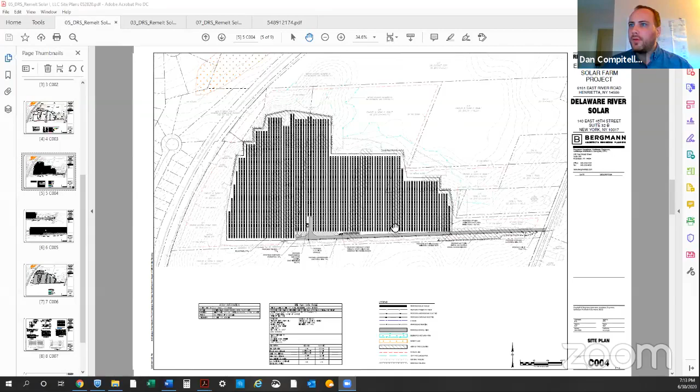Inside the solar farm itself, I'll zoom in so you can see some details. We will need to square off the northern boundaries of some of the treed areas to create the footprint for the project to sit within. There are also some hedgerows bisecting the fields that run through the property now, which we'll need to clear as well to create an open field for the solar farm.

Other than that, that's the only tree clearing we need to do. On the southern part of the property, there may be some tree trimming, because we need to make sure there's no shade cast on the solar farm from any trees in the area. Otherwise the solar panels just wouldn't operate when they're shaded. But there's not much tree clearing required for this project.

We will still be maintaining the dense tree buffer on the east side of the project, which I believe is a question the Conservation Board will want more details on, so let us know if you have questions. There's also a thick tree cover on the west side of the project, at a minimum of about 150 feet deep, rising up to a few hundred feet thick before you get to the railroad tracks that border the west side of the project.

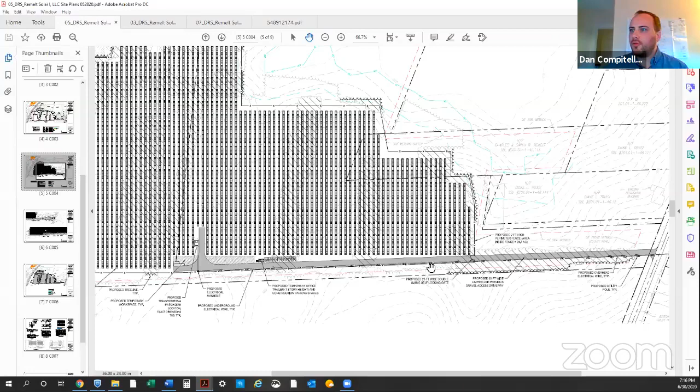We'll have an access gate at the beginning, right at the end of the entrance road, and it will wrap around the entire fence, the entire system. That fence is up to National Electric Code standards, a minimum of 7 feet high. At the road, we'll have to connect onto the RG&E power lines, which stand 40 feet tall at the road.

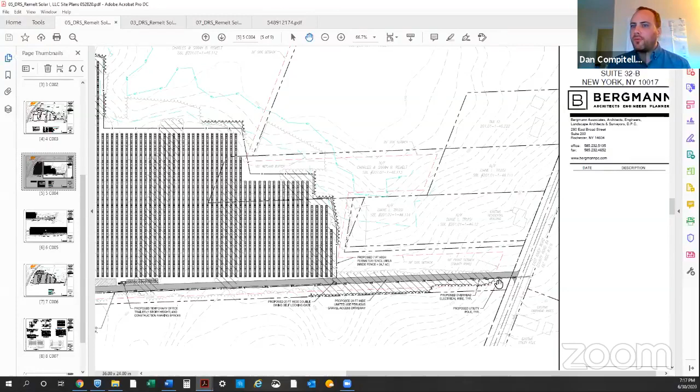So to do that, we'll need to install poles that are 40 feet tall to meet the RG&E power lines. RG&E will set 2 poles, and we will set 1 or 2 poles to meet those poles. Those are mandated by RG&E to have certain equipment on them - a sequence of poles that RG&E requires us to have on site to meter the amount of power coming out from the system, and also to have reclosers on them so RG&E can shut the system off if we ever need to maintain or service it, without having it on while we're doing that.

That's really kind of the large overview there, I think. Wanted to see if there's any questions now from the board about the project.

Is there any sort of underplanting? I've seen some solar farms have pollinator gardens planted underneath them and that sort of thing.

Typically on our solar farms, what we'll tend to do is plant a ground cover that has a nitrogen fixer with it, but we typically tend not to plant pollinators. Oftentimes what we do is we'll bring sheep in to mow the lawn and actually graze the solar farm.

So inside the solar farm, we'll set up smaller temporary fences for the sheep to herd them within, and we'll set them up on up to 5 acres at a time to graze the land. Over the course of the season, they'll mow the ground for us. They tend to not like pollinators or flowers as much, but they'll really eat anything - grass is really the preferred ground cover for sheep.

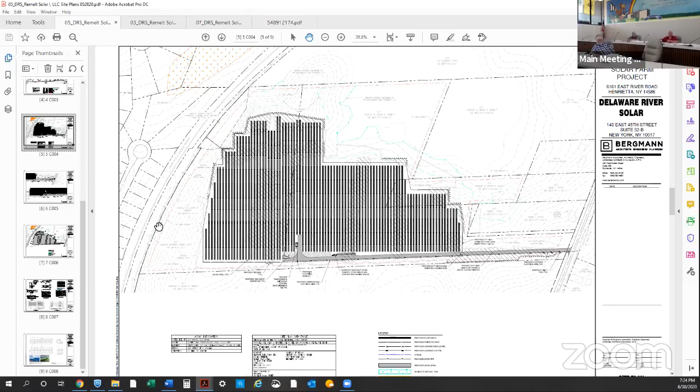Right, in fact this will probably be more shielded than that system at RIT. It's farther back from the road and has much more screening. I actually just rode by that the other day and could see it. This, I think, is probably almost a couple hundred feet further from the road than the RIT project is. You could see it if you fly over it, but not if you're driving by.

Right, okay, that's fine. Thank you.

Just to jump on that further, so the residents to the west, they won't be able to see it either, Dan? That's correct, right. The trees are quite thick on the west side, a minimum of just over 100 feet thick, that forested area to the west.

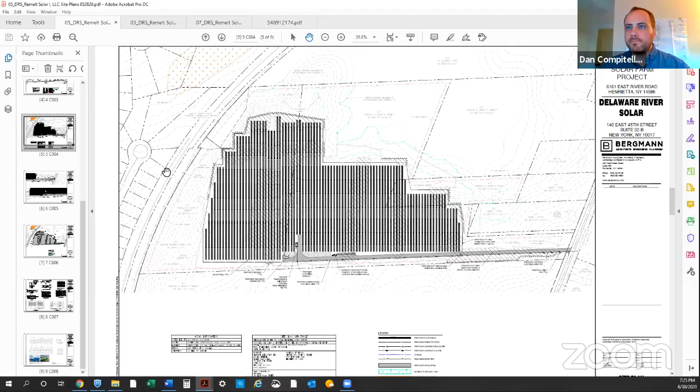And they're roughly the same elevation? No. Actually, Dan, do you have the topography handy? The solar farm is actually going to sit quite a bit above the railroad tracks and the houses back there. Okay, so they won't be able to see it. Okay, great, I see that.

Yeah, it's 50 or 60 feet of vertical, so it looks like a treed slope going up to it. So you wouldn't be able to see that, would you? That's good. I was actually just this week in the middle of that wood lot that's behind, between the railroad track, and even in the middle of it, you can't see those houses looking down at them. Great.

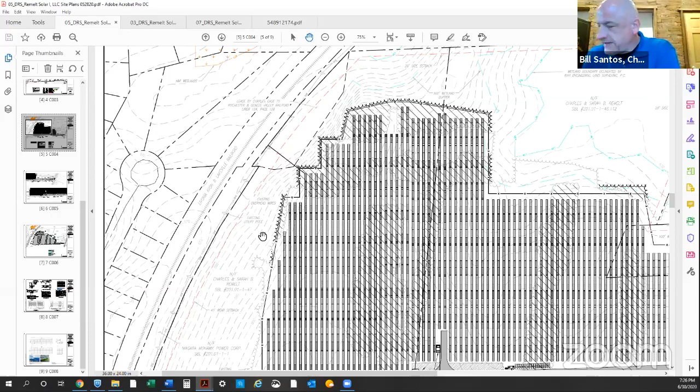I noticed the title had a 1 in it. Was there another phase expected? No, not at this time.

And to meet with the town's requirement of 25% of the available farmland on the property. Right, the green space. Yeah.

I see. So, sorry board members, I started jumping in. Are there any other, Noreen, did you have anything else, or Bud?

I was just wondering if there are a lot of ash trees in that forested area that might fall into the solar panels, and if that would be taken into account when the site's being prepared. Actually, there's very few ash trees back there. Most of that woods is maple and oak. The piece of woods directly behind my house is full of ash, it looks like a giant went in there and dropped pickup sticks. But that's primarily where they're confined on our property, in the piece directly behind our house.

I think it's a great use of the property. Is this part of, I can't think of the whole name, but the community aggregate program the town is trying to get? Do you know what I'm talking about? The agricultural preservation? No, I mean where residents can purchase solar as a community, purchase power as a community.

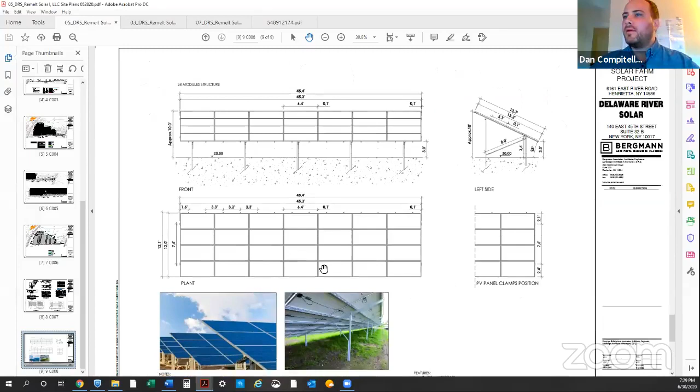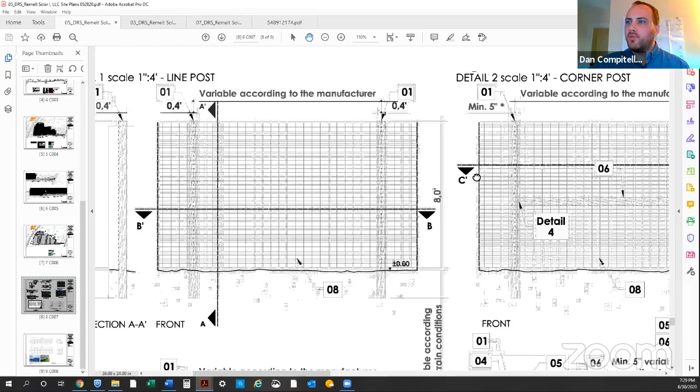No worries, I can bring up a picture of that. Let me see if we have it. Right there on bottom left, Dan, I believe. I'll zoom in here. It may be a little grainy, but this is a section of one of the panels. So it's a grid instead of chain link, which is more of a diamond shaped grid.

And what's it made of? It's made out of 16 gauge steel. So it's going to mesh in with the surrounding landscape, it's not going to stick out like a sore thumb, is kind of what I was trying to get to.

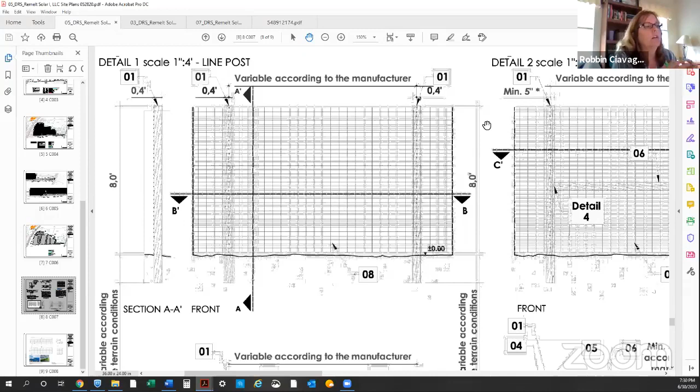So I have two other questions. One is on the road coming into the solar park, there's a neighbor's house there. Have you had any feedback from her, negative or positive? I've actually spoken with all the neighbors and they're all very aware and very, very supportive. They're quite happy that the land is going to be used for this.

Perfect, and one more question for you. So again, on the road coming in, it looks from your slashes where you're showing what trees you're taking down, like you're almost going to eliminate all of those trees in that one little section where the road comes in. Is that correct?

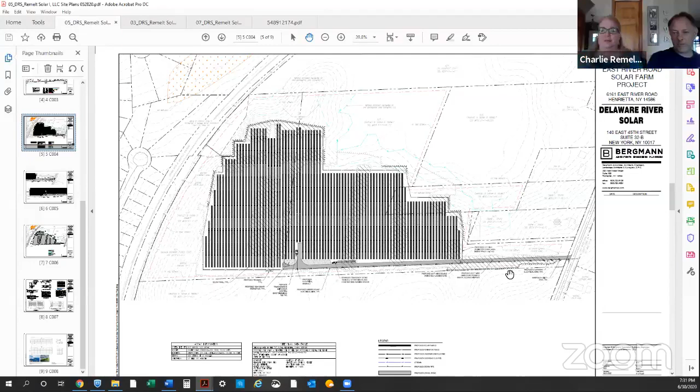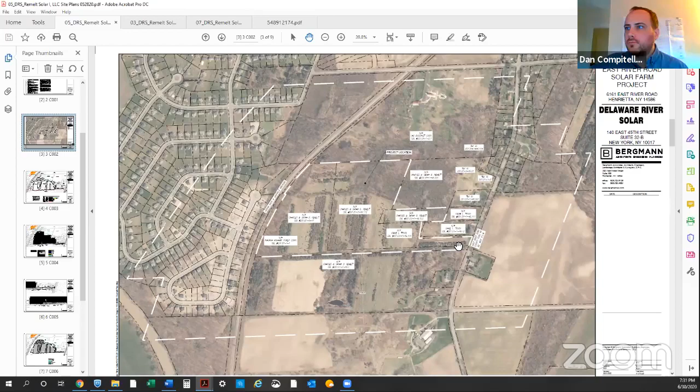So if you went to the picture, C002, and then right where your hand is right now, see the up, yeah, right in there. There's a bunch of, I'm assuming they're Christmas trees. Do you have to take all of those out to put the road in, or are some of them staying?

So some of those will stay. Some are in the way of where the access road will need to go. In the, no, actually, the line you're coming in on, where you've got the hand pointer, Dan, you're following an existing laneway.

So are you saying the road is going to be more where that black line is, and you're going to leave some of those trees? Between the black line and the white line on the south, correct? I believe that the access road, and it's hard to see on this aerial map...

No, bring your hand pointer down. Down, yep, right, down a little more. Right in between that black line and the white line is where the access road goes, and that follows an existing laneway that's well in excess of 20 feet now. Okay, perfect, that's all, I just needed you to help me clarify that.

They probably will, to Dan's point earlier, be trimming back some low branches because there's some maple trees whose branches grow down really low. They're probably going to be hacking some of that back, but some of that will be left for cover to the neighbor that's right above there, correct? Yeah, to the north of it. Yes, Dan, the way you have it drawn, all that stays.

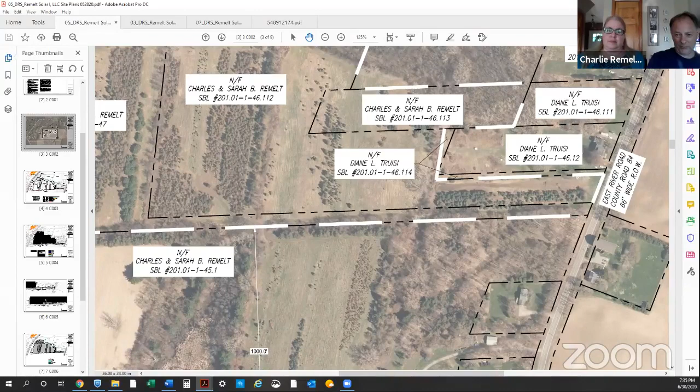They want to know how to purchase the power, that's the biggest question, how do they sign up to get this power? I'm like, give us a minute.

A couple of questions. What's the height of the perimeter fence, 6 foot, 7? The height is 7 feet tall, and that's a requirement of the National Electric Code.

What about maintenance? Those panels will probably get dirty, do they have to be washed every so often? They do. Usually the rain is enough to wash them off. Sometimes we may go out with a water truck to spray them down throughout the year if they get dusty. That can happen around planting or harvest season if dust is kicked up from a nearby field. We can monitor that in real time and know when to send trucks out, but it's usually pretty rare. The rain usually takes care of most of it, and the plantings behind trees.

I'm all set, I'll make 2 quick items. I talked to Ann Stevens and Bill yesterday, and they are very much in favor of having a small solar array of their own. But speaking of that, now you're talking about 15,233 modules, I think.

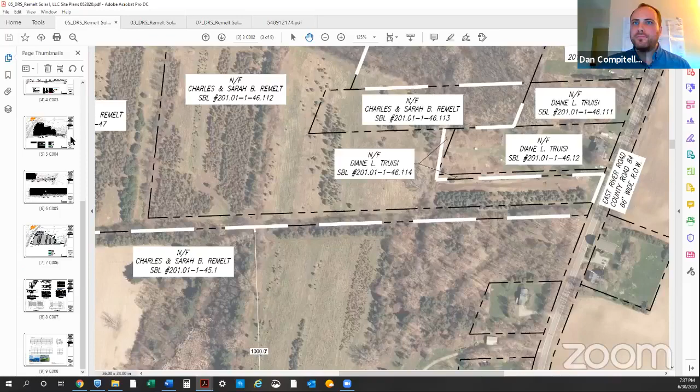We haven't proposed that yet, so I'm just going back to the overall plan here. We're definitely open to comments if the board feels there's an area where trees should be planted. The hardscape I was concerned about was things like roads, but in between the panel arrays it sounds like it's going to be all green space. So that was one of my concerns.

The other concerns are about removal of trees and protecting them. Usually we require them to be replaced, and we require 8 trees per disturbed acre, and you have roughly 25 acres, so that would be 200 trees. But you're not really disturbing everything, you're still keeping green space, so I don't know how the board wants to adjust that. Maybe some of the trees, if you're offering to plant some to protect the neighbor view along the roadway, could go up there. But I know the family has somewhat of a tree history, so I don't know if the board members have any comments on relaxing that requirement for this application.

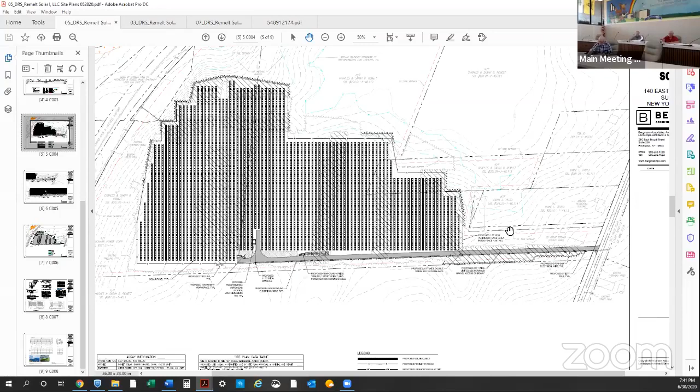Agree, yes. You can come up with better wording than I can. Okay, we'll work something out. Is there a second with that comment? I'll second the application. Thank you, Bud. Any other discussion on this one? Hearing none, all in favor, please say aye. Aye. Are there any nays?

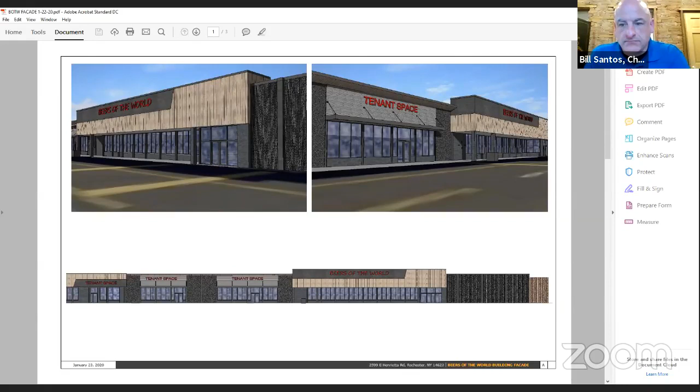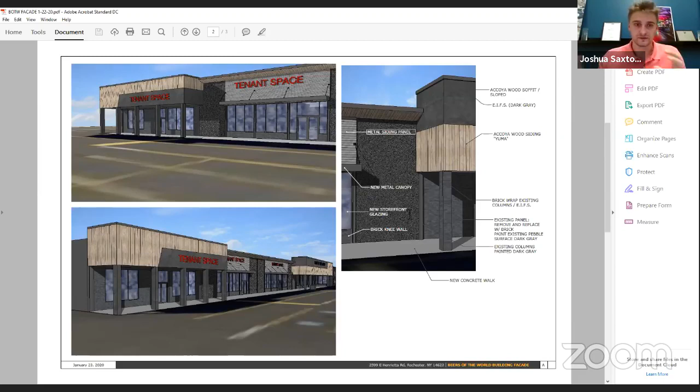So this is an architectural rendering of what the facade is going to look like - a more modern, new look, with metal siding panels, a new canopy, storefront glazing, brick knee walls, and an assortment of other things to give it a more updated look than what's currently there. This will actually match some of the facade of the Starbucks going in south of this development, creating more of a central feel to this intersection and the surrounding parcels.

So I'll go back to the plans. A lot of clicking. That's the improvements architecturally. As far as site goes, there isn't a whole lot that's going to change. Obviously, as shown, the parking layout is going to change.

I know based on code we're required to have 326 parking spaces. We're only going to have 224, I believe - if I zoom in, oh technology. Yeah, so we're short on parking, but we're going to the zoning board to get a variance for that parking.

As far as the tenants go, Beers of the World will stay in the plaza, as well as a new additional tenant space which has not been filled yet. So I cannot answer who will be moving into those tenant spaces.

As far as some other site changes, as I said before, curbed islands to improve safety of cars and pedestrians walking through the parking lot, new ADA compliant ramps along a new proposed sidewalk, which will also help improve safety and make the area more accessible. New lighting that will illuminate the parking lot to a more improved standard than it is now.

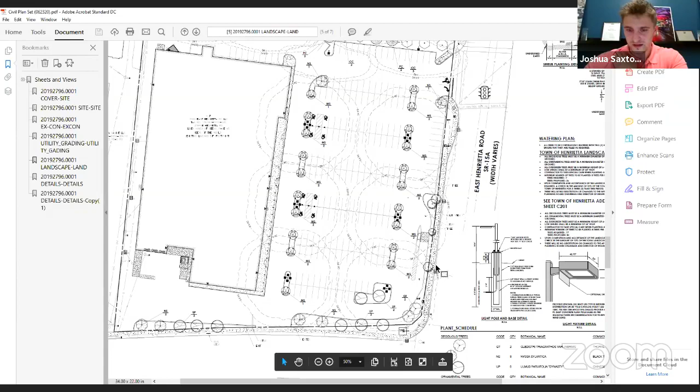With regards to the trees, I noticed that with the addition of the trees, the site goes from 2% green space to 11% green space. I didn't know if there were more opportunities to put some trees on the Calkins or East Henrietta Road side, rather than just in the parking lot spots. We are proposing some, not really along East Henrietta Road because it is somewhat cramped between our existing pavement and the sidewalk, which limits where we can place trees. But we are proposing trees along Calkins, along this northern edge that abuts this other parcel. East Henrietta Road is just difficult to plant along since it's a short distance between the parking lot and the sidewalk.

Yeah, and I always, when I go by that plaza, the parking lot seems so large for the amount of businesses that are there. I know a lot of things just don't have any customers at the moment, but it seems like there's just so much parking space there. I didn't know if there were opportunities to use it a little bit more for green space rather than having so many parking spaces.

So to answer that question about the parking, as I've stated before, the town code actually requires 326 spaces based on the building size, so we tried to utilize the space that we had.

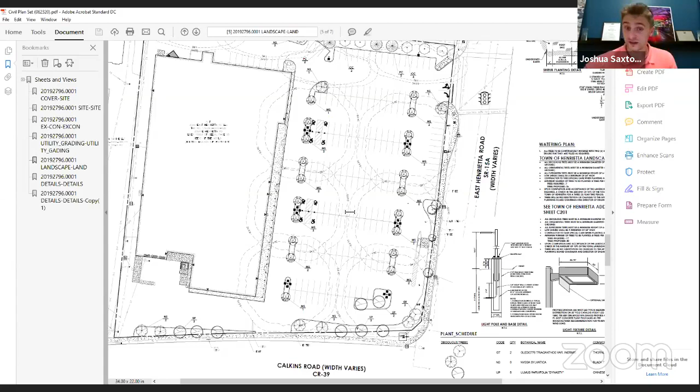As I said before, we're not trying to impact it too much—ripping up all this pavement and changing it too much. We didn't want to cause too much disturbance. It also comes down to the tenants that will be moving in; they have certain parking requirements we have to meet. We can look into reducing some parking, but based on the town code and tenant requirements, I don't know how realistic it is to remove some of that parking area from the existing asphalt conditions.

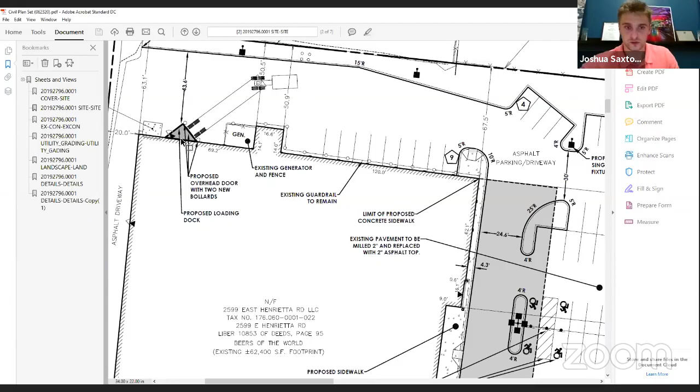Quick question on the dock—you haven't made substantial changes in the dock area where the tractor trailers unload, right? Yep, so we are actually proposing one along the northern face of the building for additional loading dock capabilities. Along the southern side, there are existing 2 overhead doors that we're going to maintain. So in reality, we're only adding this northern loading dock area.

Okay, and the southern one hasn't changed? Nope, that'll stay existing. Okay.

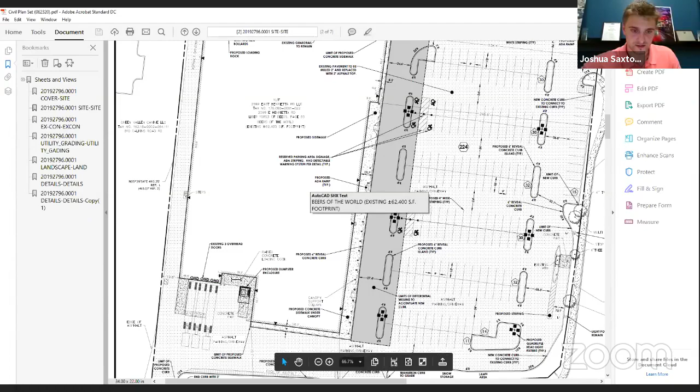Will that serve all the tenants—the southern one, and then the northern one for the north? I believe the north will serve Beers of the World, which will maintain its spot. The south, I think, will also serve the tenants as well as Beers of the World. I'm not 100% sure on the internal configuration of where those overhead doors go, if it's only for one tenant or for two.

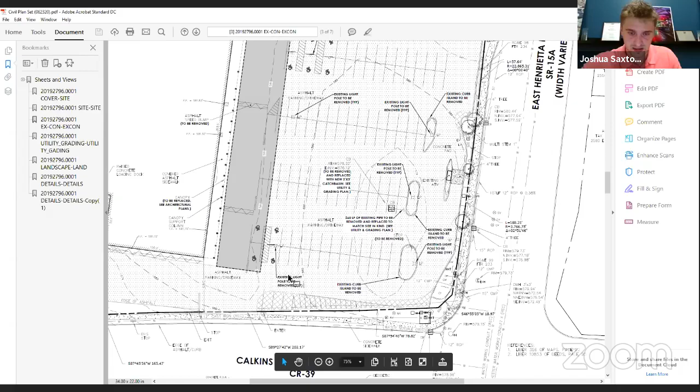I didn't delve too deep into this existing plan, but as you can see, this dotted hatch in the parking lot encroaches a lot of the parcel—it's almost 100% impervious area if you take into account the building and paving. Right, so we're adding in some green space. This area was paved before; we're going to make it grass as well as adding trees. Some of the parking islands weren't curbed islands with vegetation—they were just striped on the asphalt—and we're converting those to curbed islands with trees.

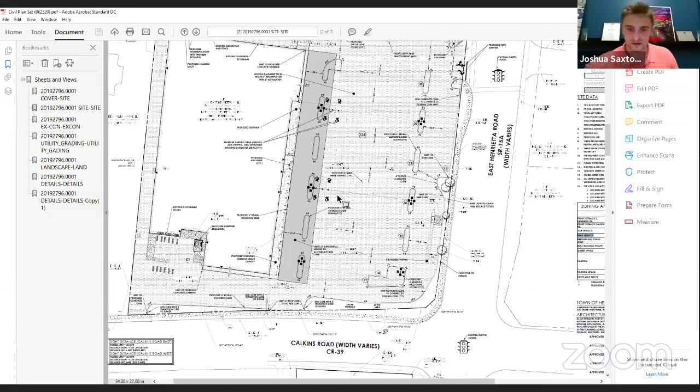So we tried to increase the green space as much as we could without completely overhauling the entire site, trying to make drive aisles work, reach parking requirements, and maintain existing conditions. There's that existing ATM that needed to be maintained, so we couldn't really touch that area. There were some constraints on how much we could expand, but we expanded it as much as we could as far as green space goes.

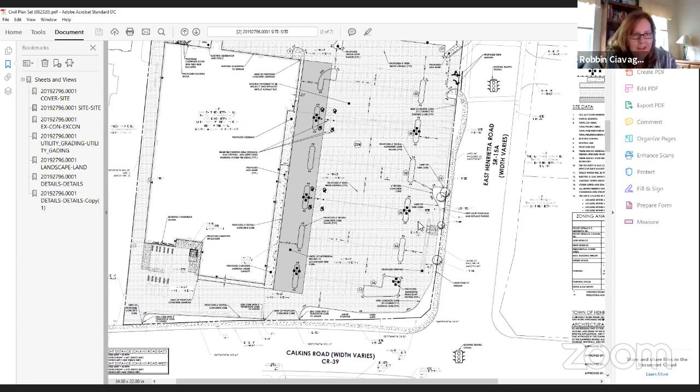Well, tell your client thank you very much for improving a not very good looking part of Henrietta. I do appreciate it. That's all I had. Thanks, Robbin. I agree with Robbin.

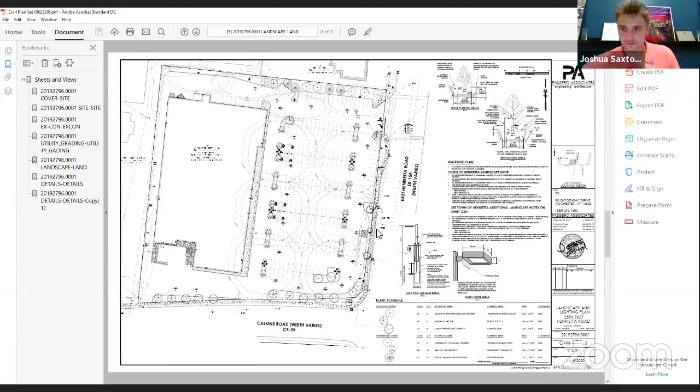Josh, would you mind going back to the landscaping plan? Down to the list of plants. Zoom out a little bit—oh, too much. Do you want me to zoom in anywhere specific? Yeah, down at the bottom, I'm wondering about the number.

That's what I figured—all the small trees in the island beds are all those little crab apples. Right. And the one tree I hope you could substitute is the pear, maybe a serviceberry instead, just because those pears are invasive. You said a serviceberry? Yeah, serviceberry would be okay, similar form.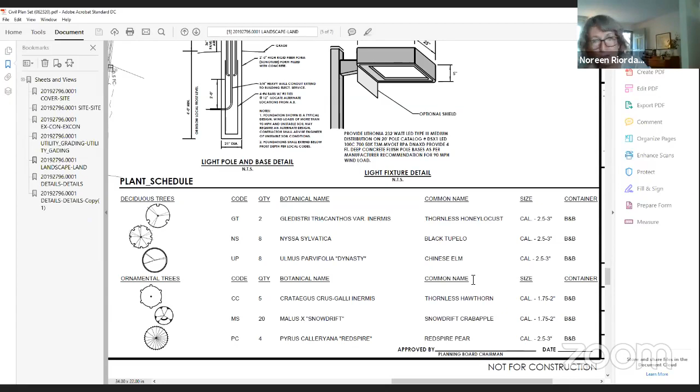Yep, and I understand the look of having all those crab apples together. Could you show what the islands look like a little bit closer?

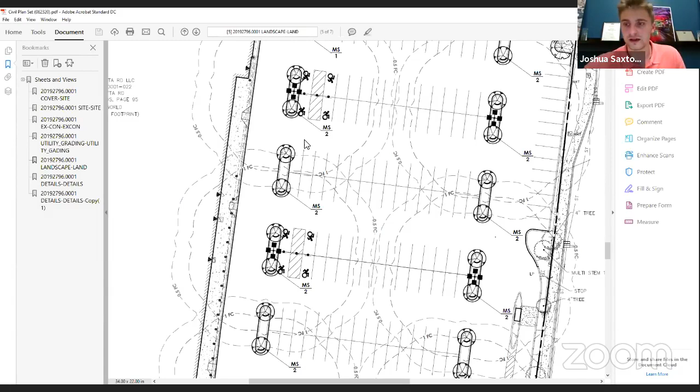So it'll mainly be the trees on both ends, and in certain islands, the lights in the middle. What is the length of those islands, do you know? The islands themselves would be 36 feet, because these parking spaces are 18 by 9—so it's kind of like an additional parking space that got converted to parking islands. For the width, I can check the site plan, but it should be around 8-9 feet.

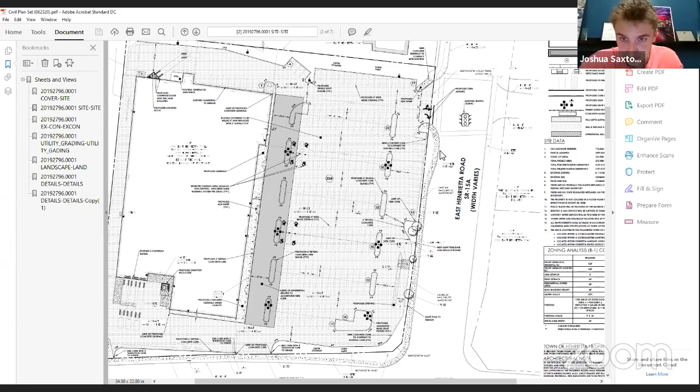What is the swoop of the sidewalk up at the top there? I believe that's existing, and that's off our property, so we don't really have a say on the orientation of that. Yeah, I never noticed it before, it just looks like it goes into the road, but obviously it doesn't. If I had to guess, maybe when they added this right turn lane, they had to match it along that, so that's why it swoops in with that taper of the turn lane.

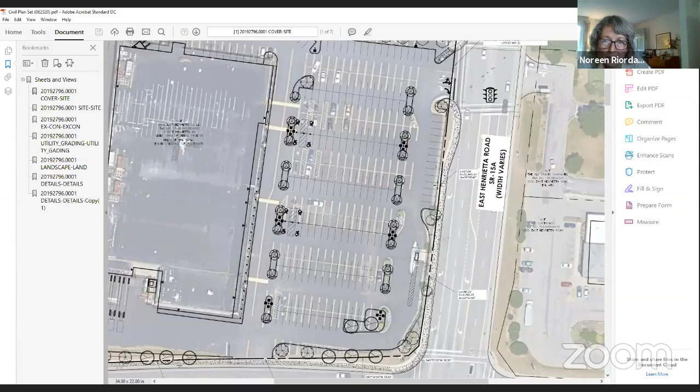My other question is, I know when they put that ATM in there, those trees are way too tall for under the wires. So what are you planning to put under the wires?

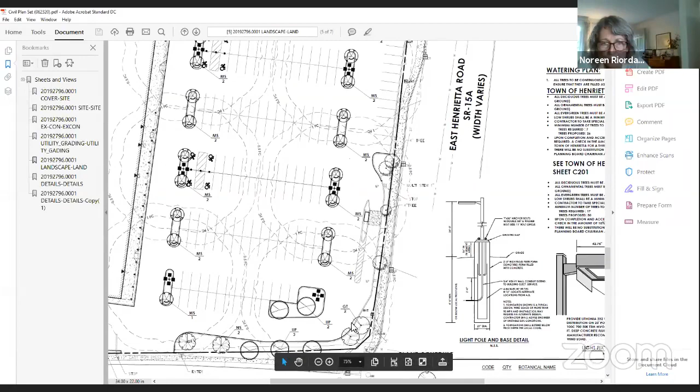I don't believe, let me double check. Yeah, other than this tree up here, it doesn't look like we're proposing anything. Those two at the corner there, those are locust trees. So are you concerned of the height of those maybe impacting the wires? I am, because you know how RG&E comes through and carves out and makes the trees look horrible. So if they're going to get too tall for those spots, maybe you could look into putting something that's not going to get that tall to save them. Yep, I definitely agree.

So Noreen, I actually have a question for you. The trees that they're proposing, since you know more about them than I do - this is a huge concrete area. Are these trees pretty hardy? Are they going to survive the heat coming off that concrete in these small landscape areas?

The only ones I'm really concerned about are the Nyssa sylvatica, because they like wet spaces, but I've noticed people using them everywhere in this parking lot desert, and they seem to do okay. It comes down to the initial watering the first year. If we have periods of drought like we're having right now, they're going to bake. But under normal circumstances, if they are maintained for the first year or two, they should be okay from what I've seen around town.

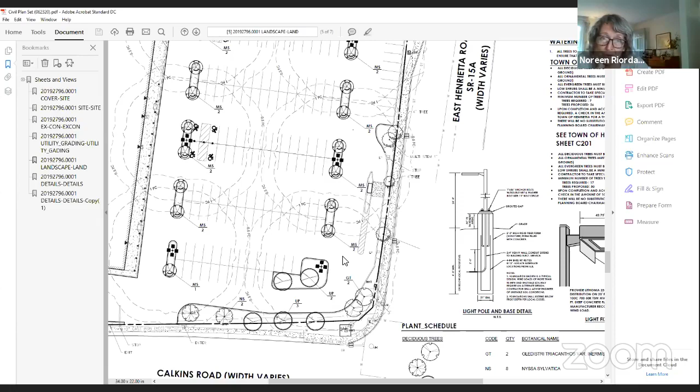Okay, thank you. Along that same question, Noreen, do the root bases dig into the asphalt, or are they good as well? That's always a problem. Yeah, they're opportunistic, they stop when they get to concrete. So the places we make trees grow, it's really kind of amazing that they actually grow at all. But over maybe 50 years, they might crack the asphalt or something.

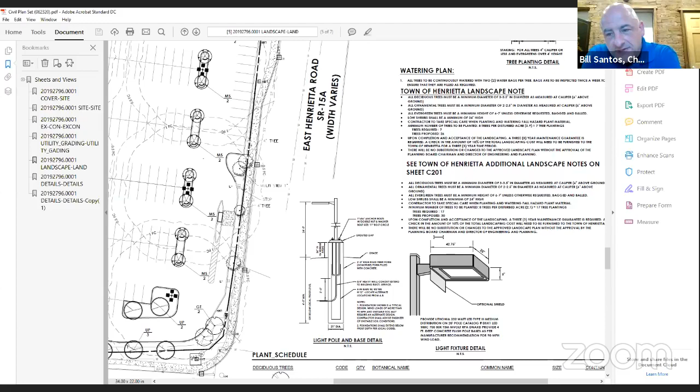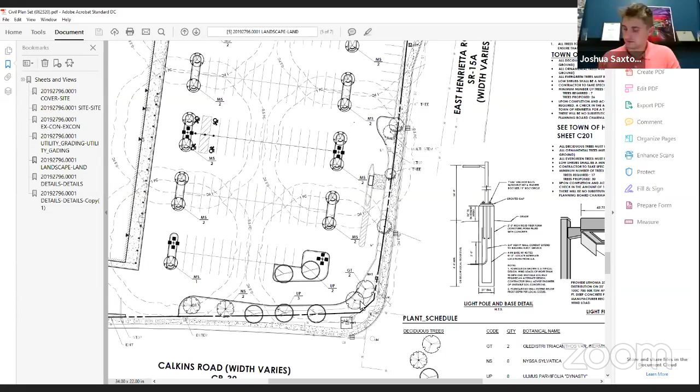So what about the other option of having a landscape area or mall instead of the tree at the front, at the corner - the ones under the overhead lines that Noreen was concerned with? What about exchanging that with a planting area? Would that be acceptable with you, Noreen, and Robin?

What sort of planting area, Bill? Like a multiple stage planting area instead of planting trees. You've seen them at other places where they had overhead lines and made an entry out of it, a decorative planted entry with multiple tiers of plantings. You mean like putting bunches of daylilies and a few shrubs rather than an actual tree? Yeah, exactly, or stage them on different levels so you could see different heights - it was just another idea I wanted to throw out there.

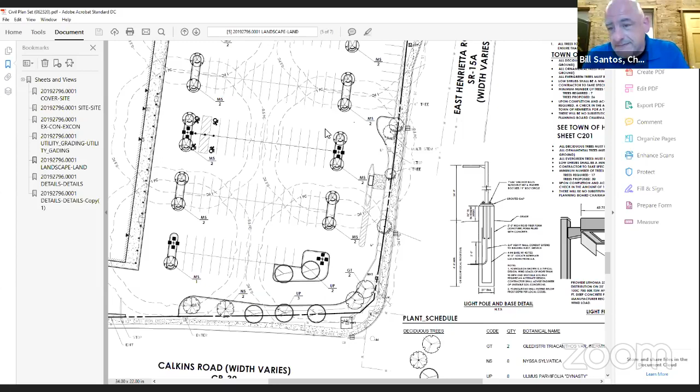I think I saw them on Jefferson, a couple places where they've done that at entries. I'd think instead of planting a tree, they could incorporate their signage with it as well. So is there going to be a sign in that corner, a new sign?

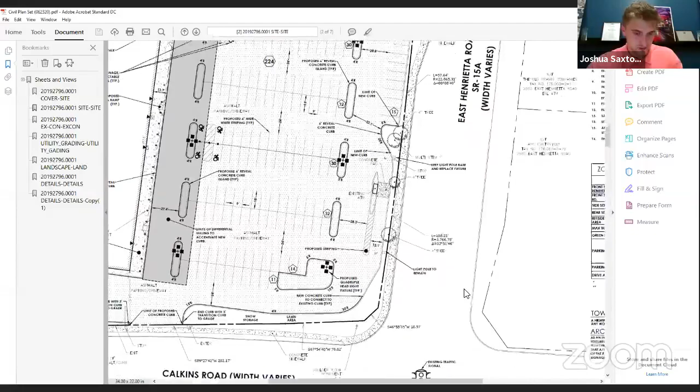I don't believe so, let me check. Doesn't look like we're proposing any signage. Yeah, Josh, I don't think we need it there.

Noreen's much more knowledgeable than I am, but I am open to, instead of trees, maybe bunching some daylilies and putting in a few hardy bushes that'll give some height. But I would defer to Noreen on that. It's funny, because this year, now that I'm working out of my car, I realize there is no shade anywhere - I drive around in parking lots and there's no shade. So I have to say I vote for a tree if you can find one small enough. The shrub idea is nice, but it requires a lot more maintenance to keep it looking good, as you see from the CVS right across the street from this spot. So I think a tree would be better, but however it works.

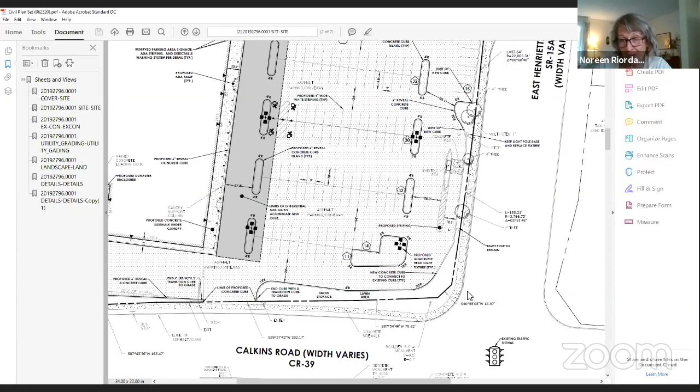But you should be able to find something either that's columnar that you can move off center so it doesn't get near the wires, or something that's just shorter.

Just to add on to that, we're kind of limited with our property. We can't really plant or do anything outside, so that limits where we can plant. The tree might be better since it's a singular area instead of an expansive landscape area, but I think that would also look good. We're open to both, but I think the tree will probably be the one we pursue.

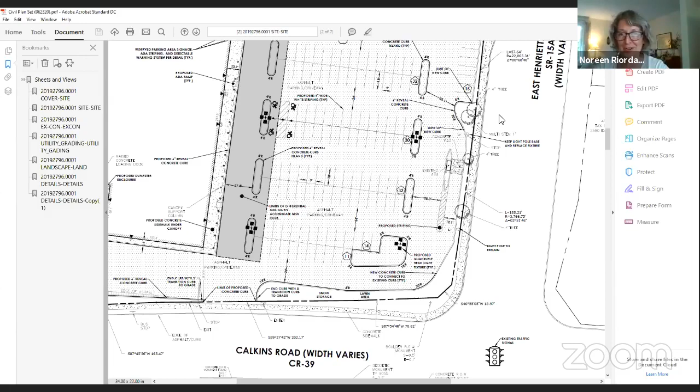Okay, yep, I was just offering another option, that's all. It really is amazing how there's no shade anywhere. Everything is north to south, it seems like. So the trees are here and it's east to west, and you can't park underneath them. It's very interesting.

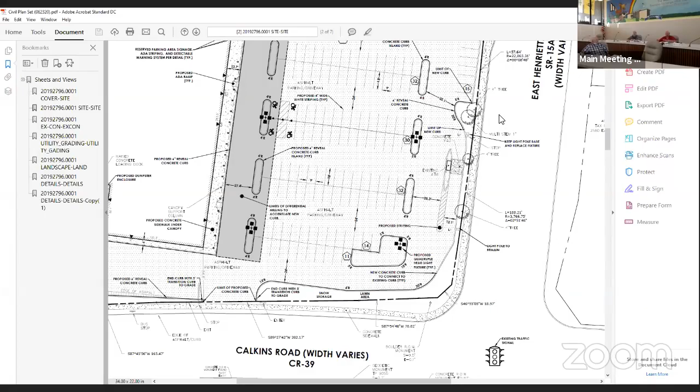Thank you. Josh, one quick question. Maybe I'll fill in for Sarah here, but it's been a dry month out there and we're putting so many new trees in. I'm thankful for that, but do you have plans for watering bags, or what provisions are taken care of?

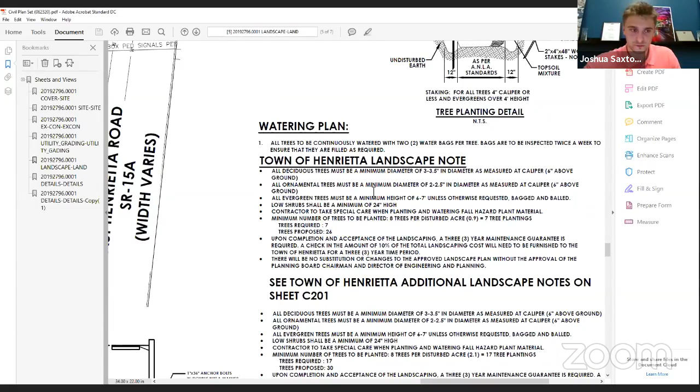Yes, we do. It's on the landscape plan, and we can make modifications. I believe this is where we've landed: all trees are to be continuously watered with two water bags per tree. Bags are to be inspected twice a week to ensure they are filled as required. That's the current watering plan. If you guys have any additional notes or requirements you want us to include, we're more than willing to edit the watering plan.

That's pretty amazing, I don't think I've ever seen that before. I think we always had the old one, and I believe you guys have always recommended the twice-a-week inspection, and this is one of the times we finally have it on the plan. So I believe that's a more than satisfactory watering plan for the trees. Yeah, I agree.

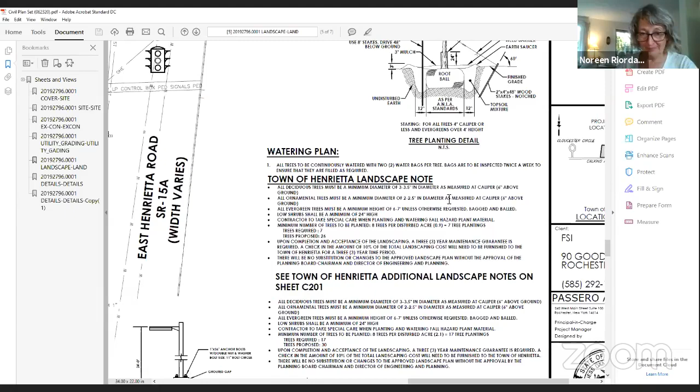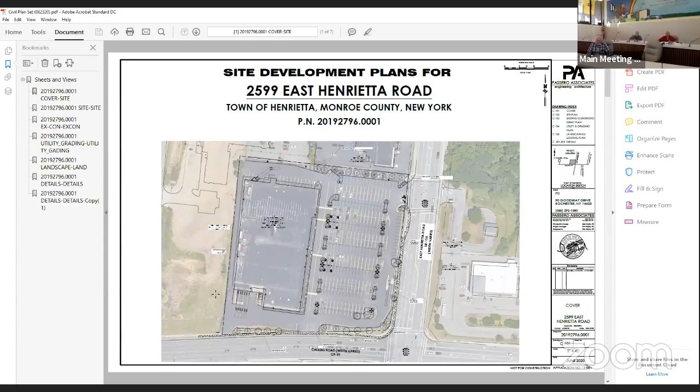But anything else? I have one question. From the parking lot and the roof, does it still exit and go to that detention basin west of the building? Oh, it's off-site. I don't know if we have, are you talking east or west? I believe, are you talking in the building, you said?

Hey Fabian, can you repeat that for us? Also, there isn't much change, so. Yeah, it's all of the existing stormwater drainage for the entire site. We're not modifying that at all. We're not adding any new storage or anything. Based on the minimal impact, there won't be a need to update or change it, so all of the existing stormwater runoff paths are maintained.

Thanks, Fabian. Anything else? Also Steve, anything? I'm all set. Thank you. Okay, great, I think we heard from everyone, all set. Yep, looks good. If there are no other comments, then I need a motion, could someone move?

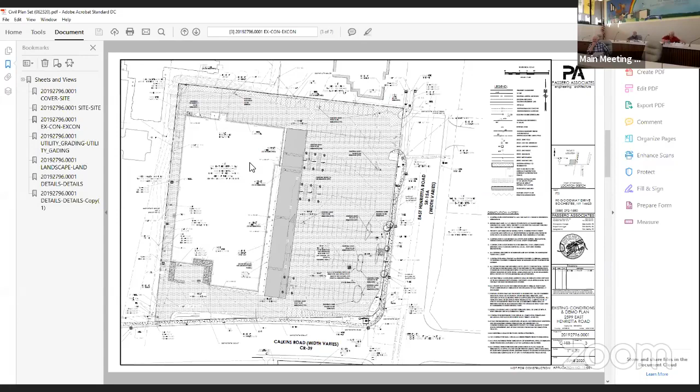That'd be great, I'll motion. Okay, I heard Noreen, and I heard who else? Steve? Yes. Okay great, moved by Noreen, seconded by Steve. Any other comments? Nope, there being none, all in favor? Aye. Aye. Aye. Opposed? Great, motion is approved. Thank you, Josh, for coming in.